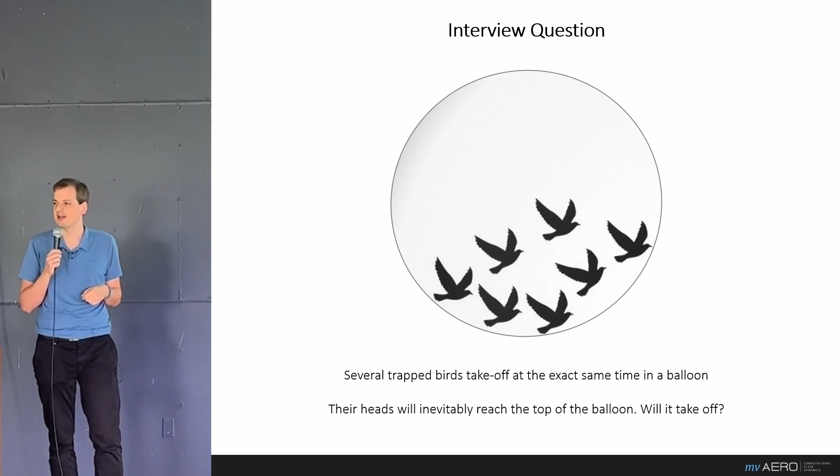Here's one question I remember, and it has to do with a couple of birds that we trap inside a big balloon. John said that he would give the signal to these birds to take off at the same time. And then he would ask me, well, these birds will inevitably take off, and at some point, their wings and their heads will reach the top of the balloon, imparting some of their momentum. So, will the balloon take off or not?

Well, I won't give you too much time to think about the answer. I wish I could. But what John was after was really to see if I had a fundamental understanding of aerodynamics. And that means that whenever the bird goes up, something else must come down. And that something else here is air. That's a fundamental action-reaction principle.

So whenever the birds are hitting the top of the balloon with their heads, an equivalent momentum is imparted by the air pushing down on the balloon. So the answer to the question is no, the balloon does not take off, it actually stays put. It may tremble a bit, it may shake a bit, but overall the balloon will stay where it's at. Another way to look at this question is to see the balloon with air and birds as a closed system. From this closed system, no downward momentum can escape. Hence, the balloon does not lift off.

Well, I guess I passed the test, and John and I really hit it off from there. I think where John and I really hit it off was where I introduced him to modern CFD methods. So you can see on the left, John was still using VS Aero at the time, which handles about 5,000 panels for a small aircraft, while I was working with about 50 million elements for a similarly sized craft.

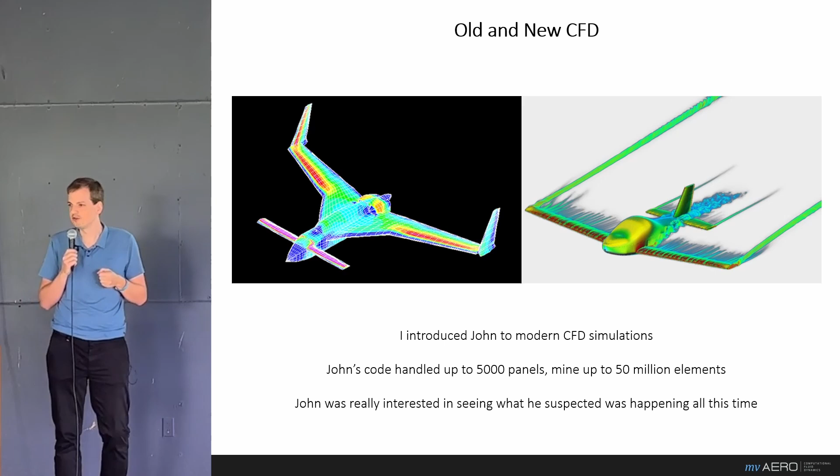Now, what John was really interested in is seeing what he thought was happening all this time. He had all this experience with flight testing and wind tunnel tests, but he never really had the tool to visualize that. And that really never changed.

Over all these years working together, John and I were always analyzing my CFD work together. Whether it was Windecker aircraft, you see on the top left, Alec Wild's Ascender on the top right, which I'll go into a bit more detail later, whether it was flap design, aileron design, airfoil design, and in the bottom right, you even see a 2D cross-section of a vertical axis wind turbine. So John and I really covered a broad spectrum of aerodynamics, which allowed me to learn a lot from John, really.

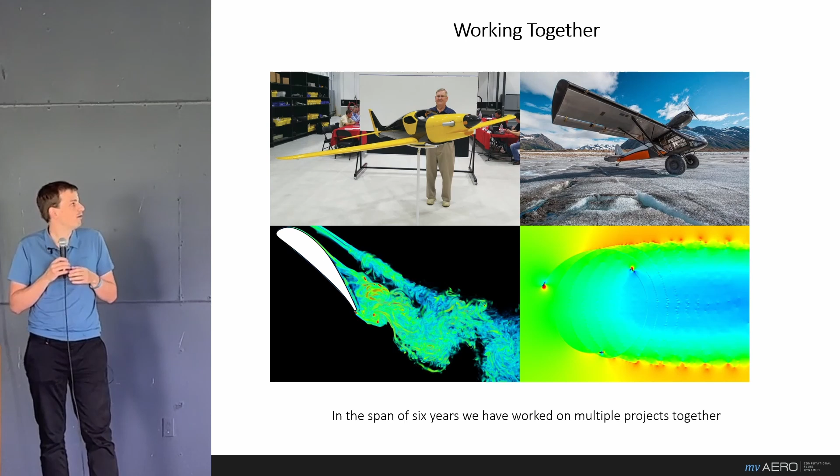And now, we cannot talk about John without going into his favorite pet theory. It's called John's porcupine theory.

When John would look at an airplane, he would notice the high number of appendages sticking out, and he would call that airplane a porcupine. To John, they were too many and also often placed at the wrong position, causing too much drag, and John would be prompted to say something like, well, at least it's a great device for too much airspeed.

That's a typical humorous response from John, and I think that is very telling of the way he approached aerodynamics. Most people would look at an antenna like that and see an insignificant addition to the airplane. In terms of weight, in terms of geometry, it is. But in terms of aerodynamics, John would see the actual drag equivalent of that.

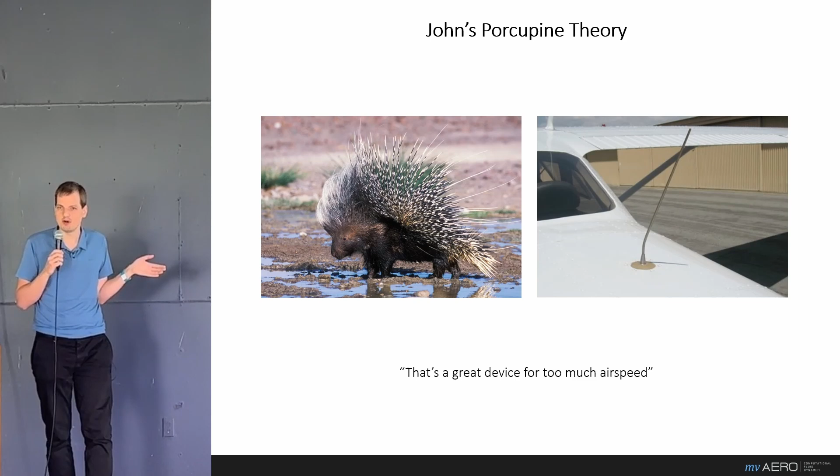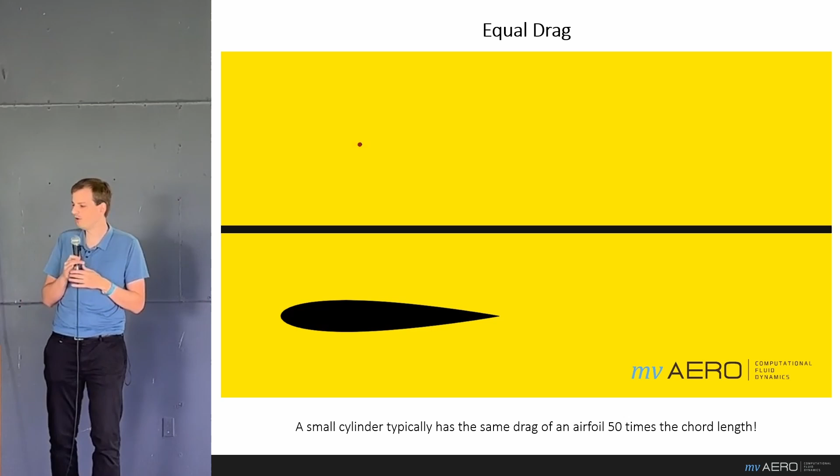That's almost like adding a small vertical tail. And if you think I'm exaggerating, here's a simulation I did of a cylinder versus a small red dot on top versus an airfoil 50 times the chord length. Both simulations are in full 3D, but we're zoomed in on a 2D cross-section.

As you can see, the flow over the cylinder is very violent. It affects only a small amount of air, but it affects it by a lot. In contrast, the airfoil affects a lot of air, but it only reduces its energy by a little. Overall, making it so that these two geometries have equal drag. So it's important to keep that in mind whenever we need to add an antenna.

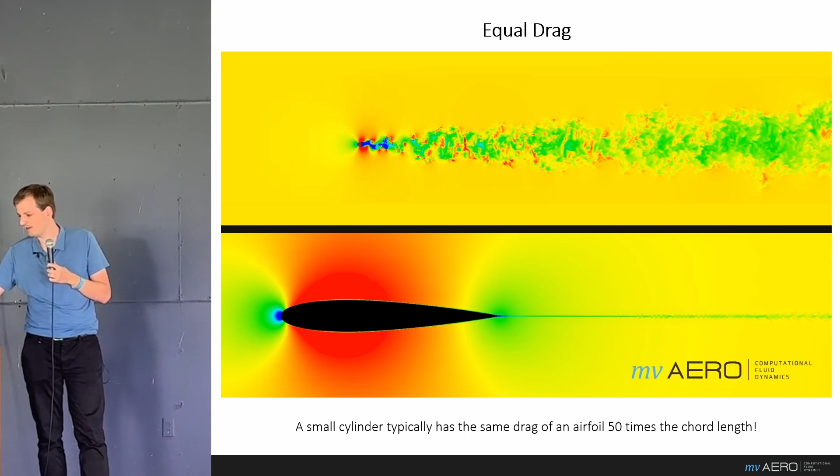Now, our next topic is the wing fuselage junction. And again, John would approach it in this humorous way. He said a wing and a fuselage are married together by force, and it's our job as aerodynamic engineers to make it into a happy couple.

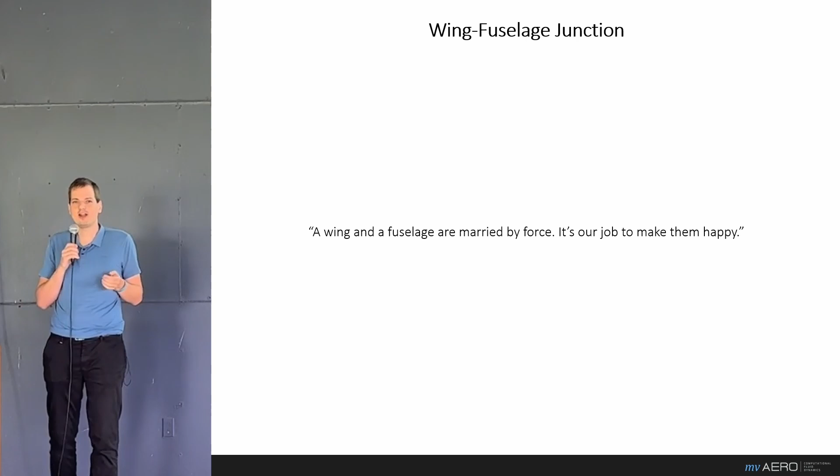Whenever you're designing an airplane, the wing and fuselage will need to come together one way or another. And this lesson recognizes that there are both good ways and bad. And that all has to do with how two surfaces interact. In general, they bring out the worst aspects in one another. One thing that happens is that the local velocities will start to increase, increasing friction per square foot of wetted area.

But the second thing that happens is now a certain mass flow of air is assailed from two directions. It doesn't lose energy from just one surface, but now two. So there's really potential for trouble here.

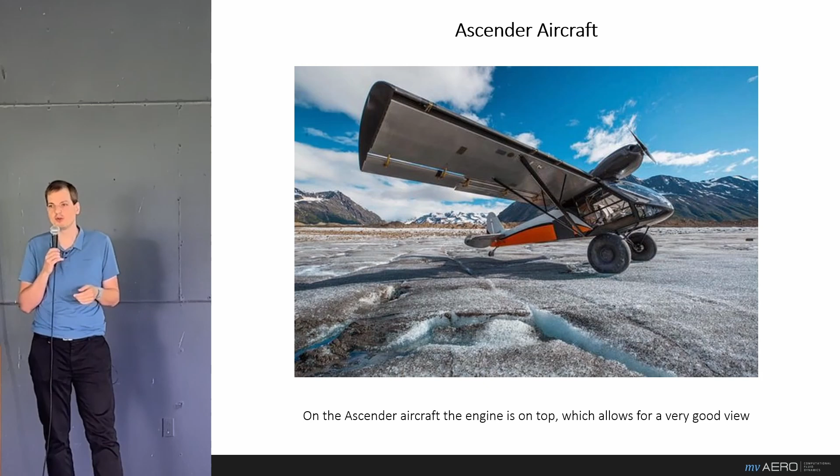And for the Ascender aircraft, the engine is on top, and it allows you for beautiful views, and I recommend all of you to look up some videos of that online, but it does introduce a very similar problem. We now have an interaction, or junction rather, between the engine cowling and the fuselage. This is, on the left, the baseline model that John and I started with.

You can notice a very narrow junction. On the right, you see a cross-section of the OML and the airplane in blue of how that junction looks. You can see it's very narrow, and the small bit of air is losing energy from two sides. So we have quite a bit of friction for the amount of fresh air.

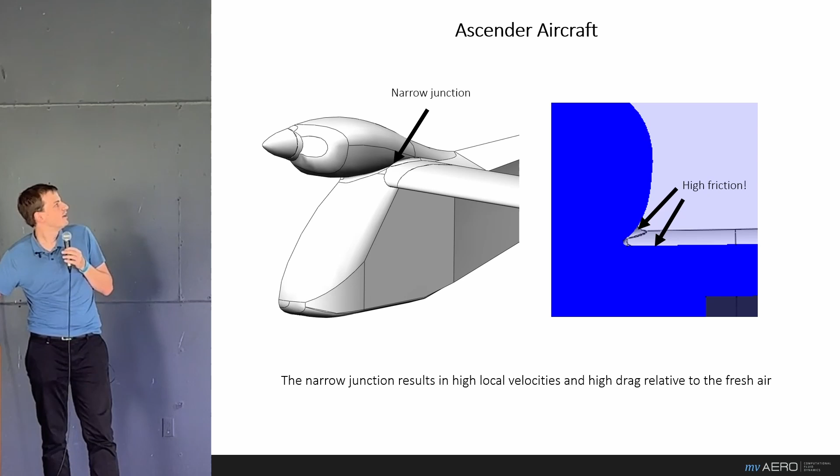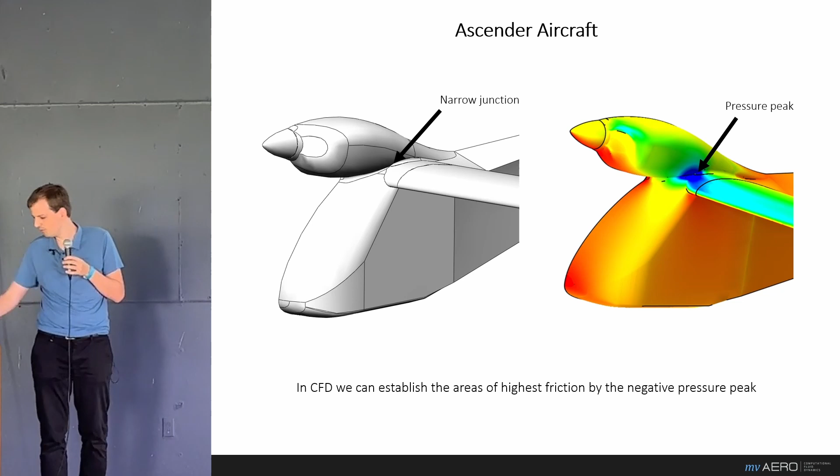Now, if we simulate this in CFD, we look for the low pressure areas. These are areas of high velocity and high stress on the boundary layer, and we notice that this pressure peak is exactly on that junction. So we have some problem here, but now that we've identified the problem, the solution also comes quite easily.

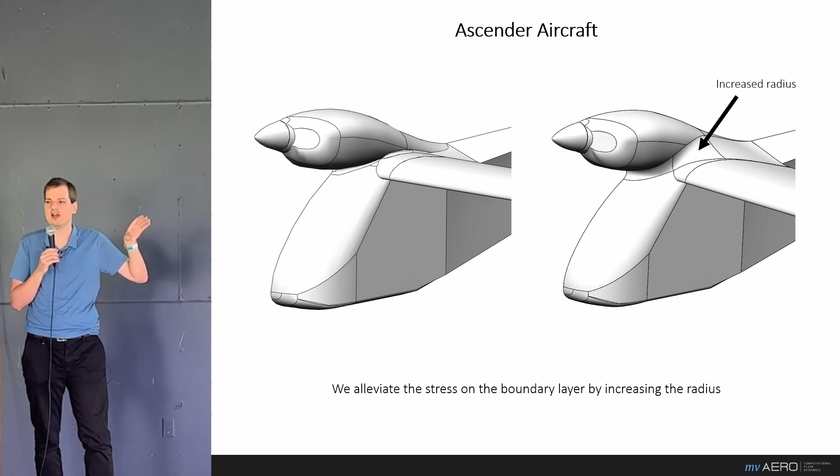Using a fillet here, we reduce the contact area with the air, so we immediately reduce the amount of friction. But we can do more. We can also very carefully design that fillet such that its lowest pressure area is changed in its location a little bit.

You can see that here. So on the left is the baseline, on the right is the modified version. And you can notice two things: the increased radius on the right, but also a lower negative pressure peak.

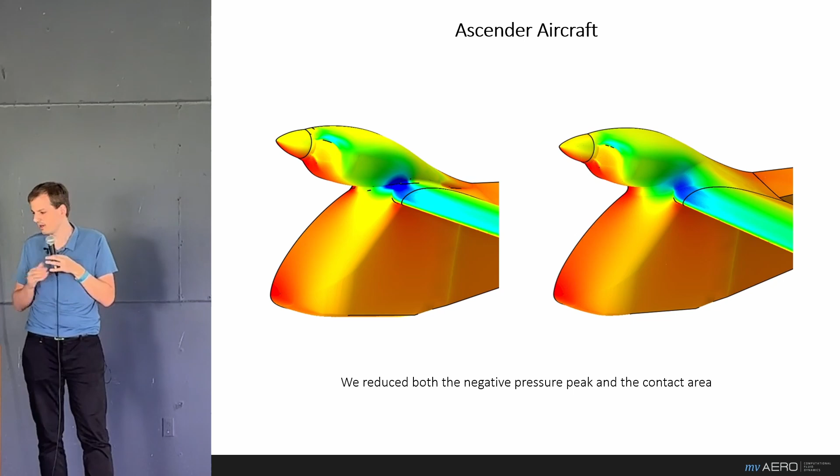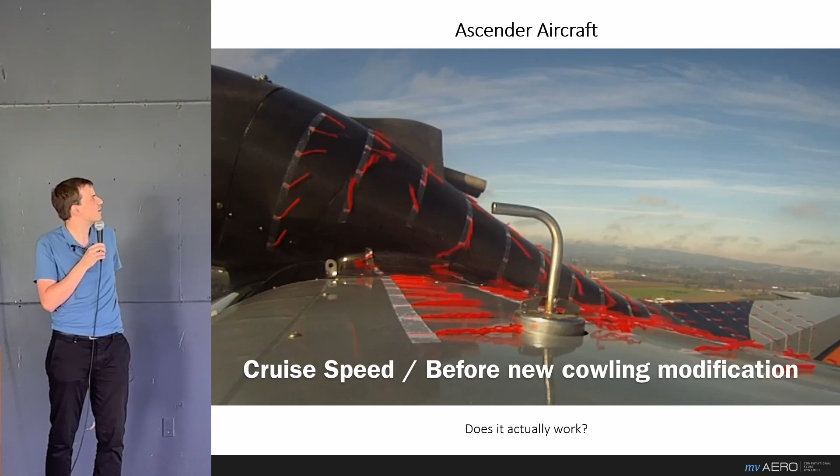Now, that's great in terms of theory, but will it actually work? Well, this is the Ascender aircraft. We're looking at cruise inboard, and you can see the junction, and the cotton veins are really all over the place. This is before the cowling modification. Some of the veins are even moving upstream, indicating large zones of separation, large turbulence in general.

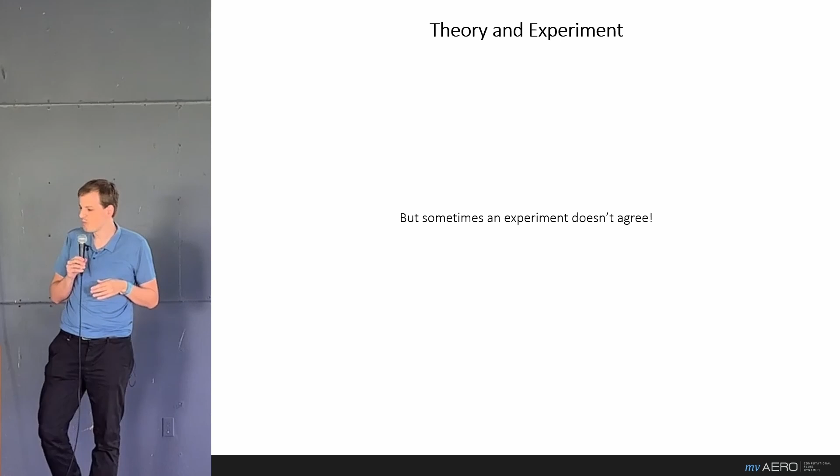Overall, I think this cowling modification is a great success. We've identified a problem. We basically had a very straightforward solution. We verified it in CFD, and finally it agreed with experiment. But there are also projects where the experiment doesn't agree, and it's pretty interesting to go into what John would do then.

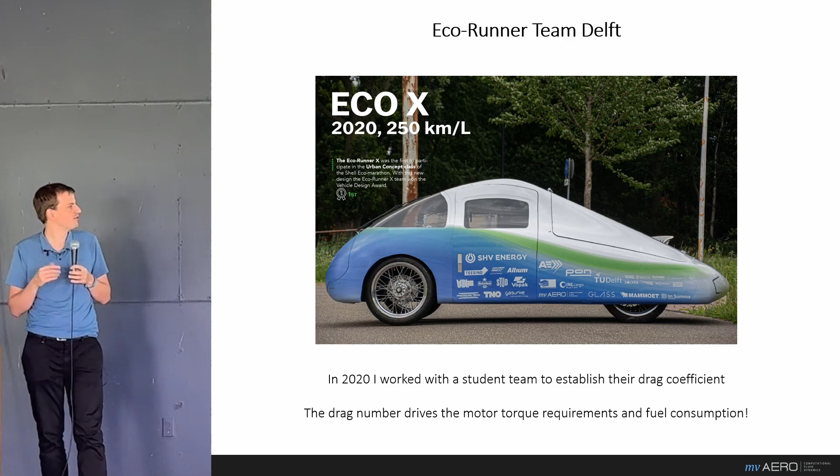In 2020, I was working with a couple of students at Delft University who had a goal for one year to design and build a small car that is as fuel efficient as possible. As you can see, it's quite a small car, and for this type of car, the drag estimation is going to be quite important. The estimation drives the motor selection, and it has a huge impact on fuel consumption.

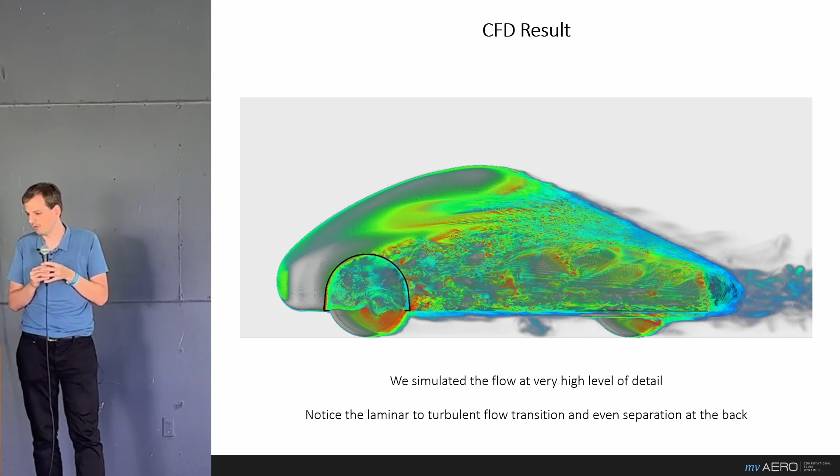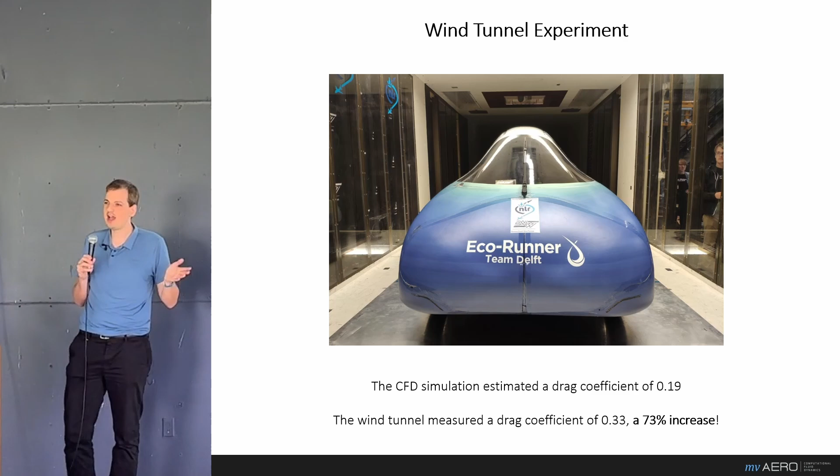This prediction was a drag coefficient of 0.19. This is months in advance of the car being built, and after the car had been built, we decided to test it inside the wind tunnel. There we found something quite strange. We did not find my prediction of a drag coefficient of 0.19 at all. Rather, we found a 73% increase. We found a drag coefficient of 0.33. So you can imagine these students weren't all that happy with my work anymore.

Well, what to do? In particular, we can ask, what would John do? I was lucky enough at the time to be able to ask him, and I discussed this very issue with him. John replied something like, don't believe the results of an experiment unless it can be backed up by theory.

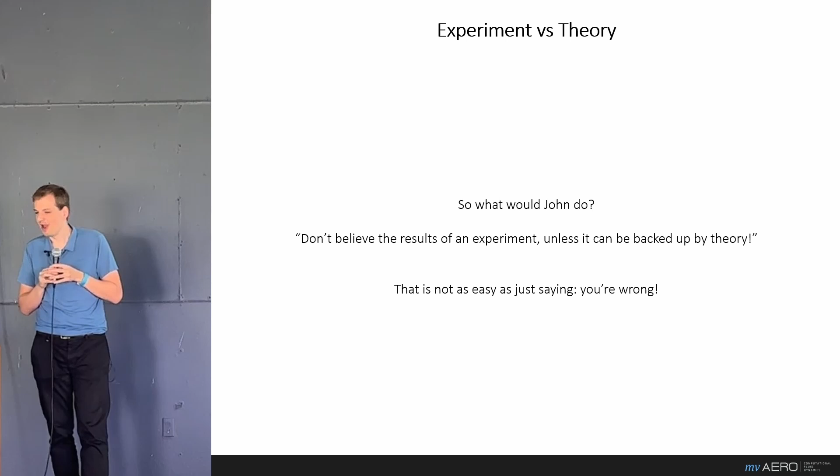Now, that's kind of reversing common practice, but it's not as easy as simply saying no. I mean, I could just tell the guys at the wind tunnel, you're wrong, and I'm right. Well, that's not like John. What John meant is, if I stand by my results, if my prediction method is fundamental to me, then it becomes my job to find out what actually happened in the wind tunnel. The burden of evidence is really on me.

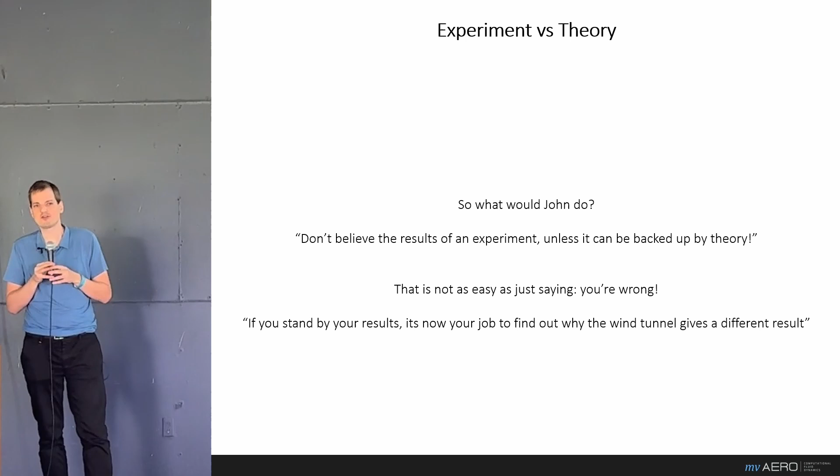So I did. I started looking back at the wind tunnel. We can notice two things from this image alone. One thing is the car is relatively large in size compared to the wind tunnel cross-section. The wind tunnel is pretty big, but still relative to the car, it's not that large. The second thing is, you may notice that the car is bolted, or fastened rather, to an aluminum base plate. The drag is actually not measured on the car directly, but rather on the combination of the plate and the car.

So I ran the exact same high definition simulation again, and that gives us a great comparison. Now we can compare what the velocity field looks like in open air versus the velocity field in the wind tunnel. Note, these are exactly set up the same in CFD, except the wind tunnel simulation has the constrictions of the wind tunnel size. You may notice immediately that the wind tunnel has much higher velocity, and this is due to blockage. This higher velocity increases the drag coefficient on the car considerably.

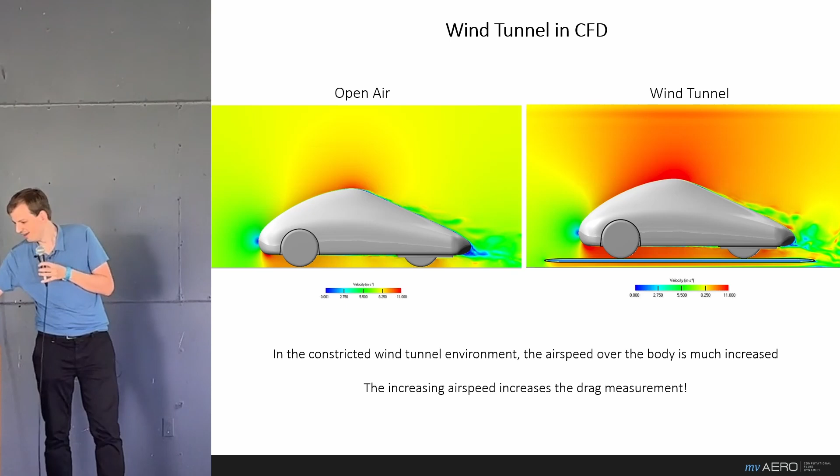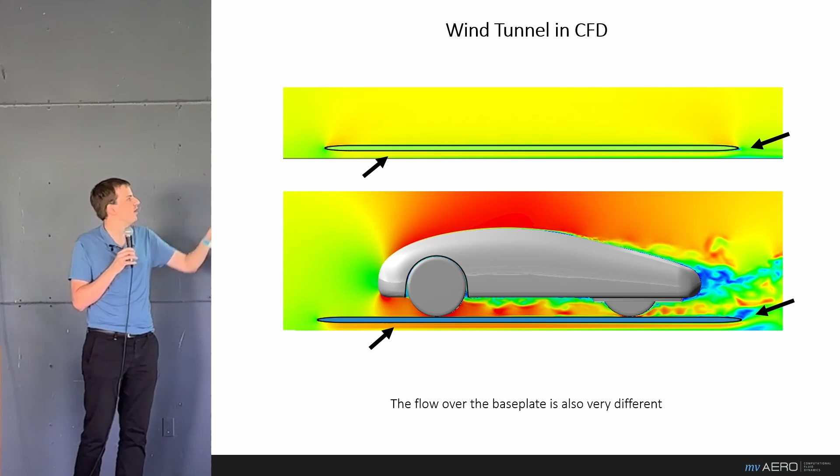Now the second thing is to investigate the base plate. Up top you see the base plate without the car in CFD, and below you see the base plate with the car present. If we focus our attention on the flow around the plate, we notice it's much more disturbed on the bottom whenever the car is present. Not only are the velocities much higher, but also if you look at the trailing edge, we notice some separation on the plate.

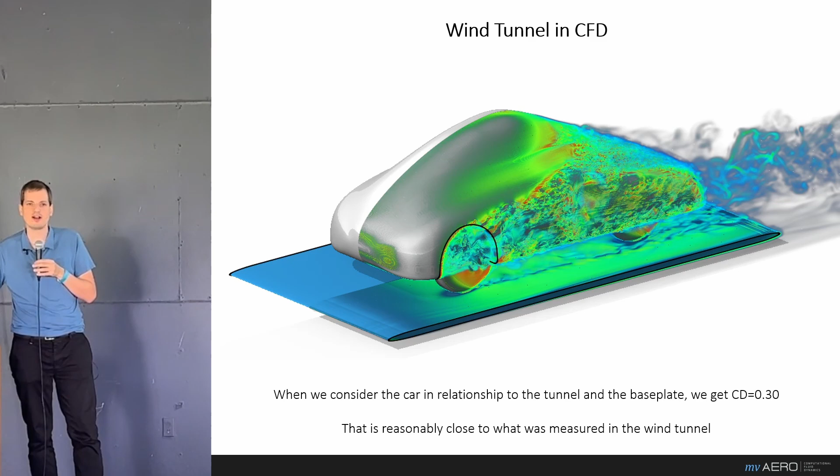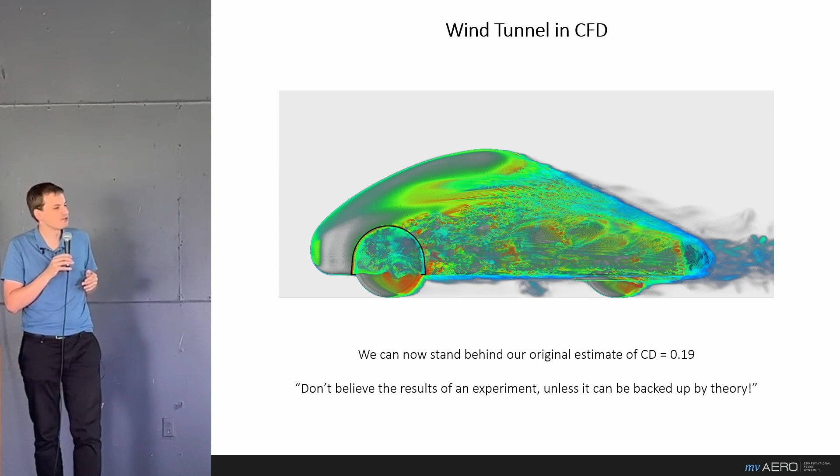Now, if we put these two issues together, we can now get out of CFD the drag coefficient as if the car would be measured in the wind tunnel. This time we get a drag coefficient of 0.3. Well, that's close enough to the wind tunnel results to me. I think this is a really great example of how the wind tunnel guys are not necessarily wrong, but it is a question whether their setup was representative of the car in open air. After all, that's what the students were after. So we can say now with quite a bit of confidence that our original estimate was probably correct. And again, don't believe the results of an experiment unless it can be backed up by theory.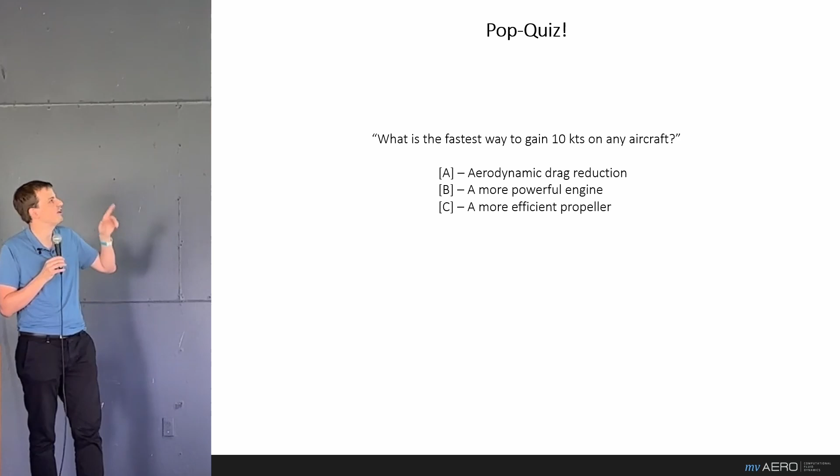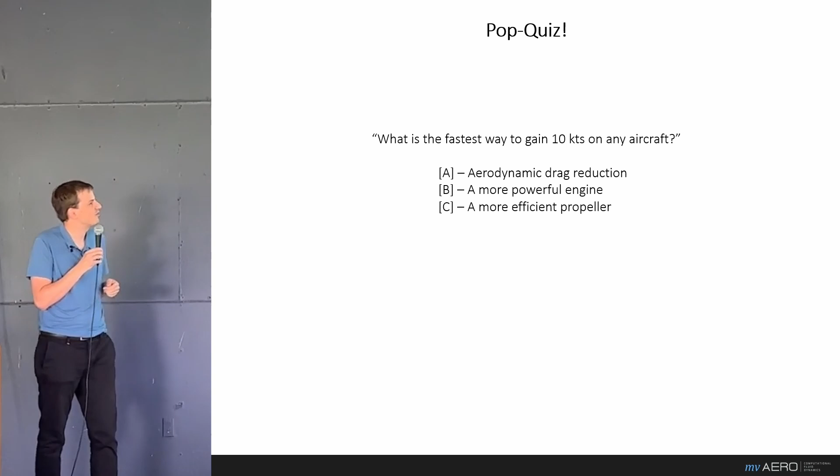Now we're about halfway through. I think it's time for a short pause in which I'll give you the opportunity to consider the answers to this question - and notice the quotation marks, it's a question by John. What's the fastest way to gain 10 knots on any aircraft? Option A, aerodynamic drag reduction. Option B, a more powerful engine. Or option C, a more efficient propeller. I'll give you all a couple seconds.

Well, is there anyone who would dare to take a guess? I have a question - how fast is the airplane going? What's the base case speed? You'll find out it's irrelevant.

Len, what do you think? I think it's D - put the airplane in a dive. Len is really on a track here. Sir? B, add more power. You do that faster than all the computations or other stuff. Well, we're getting real good answers here. I think every answer will work. Len was really close, because actually it is secret answer number D.

It's not only a question by John, it's also an answer by John. And the fastest way to gain 10 knots on any aircraft is by simply moving the static port 2 inches.

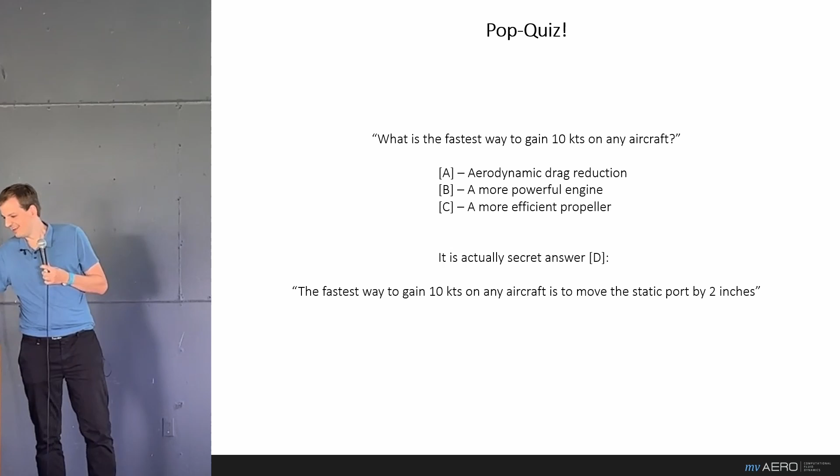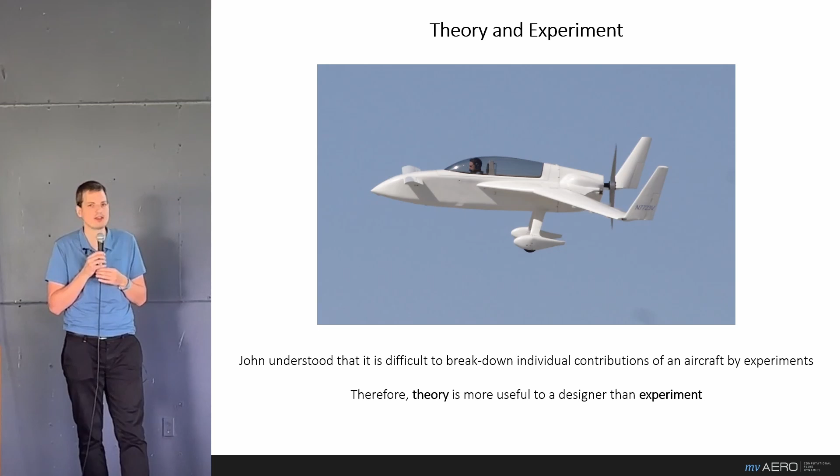Now, it's not only a joke, I think it's also very insightful. It tells a lot about how John thought about experiments. He understood that it's very difficult to break down any individual contribution to an aircraft by experiment. And that's why theory was so fundamental to John - that's why he liked it so much. He could really get into a drag breakdown with theory, and not by experiment.

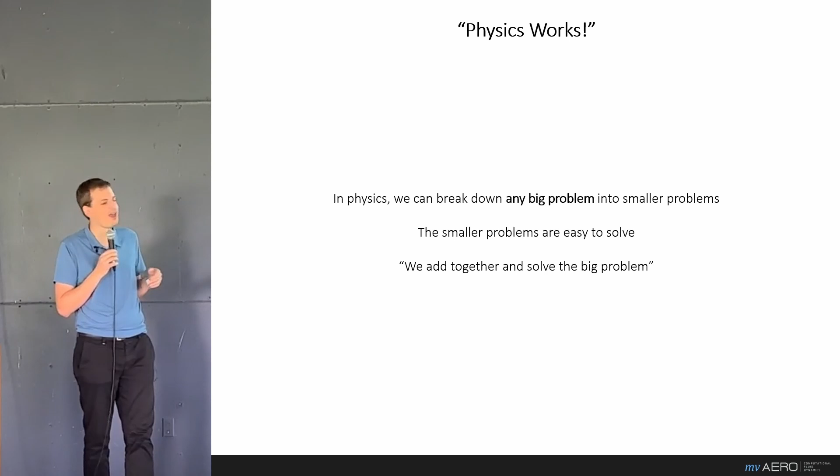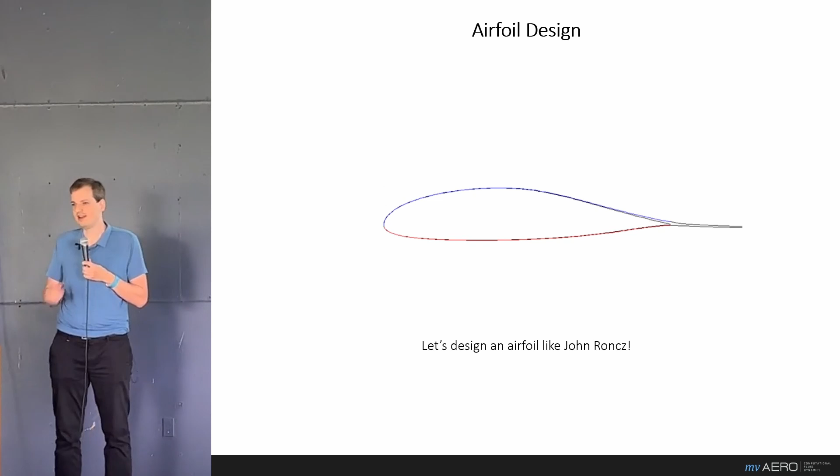Now, what impressed me most about John over these years is his ability to look at a big problem and break it down into a number of smaller problems. He would say 'physics works!' with an exclamation mark. He'd say whenever we look at the small problems, they're pretty easy to solve, and when we add them together, we've just solved the big problem. I can't think of a better example to showcase that, especially in tribute to John, than designing an airfoil together. We're going to use a step-by-step approach, and I'll show you it's really not that difficult.

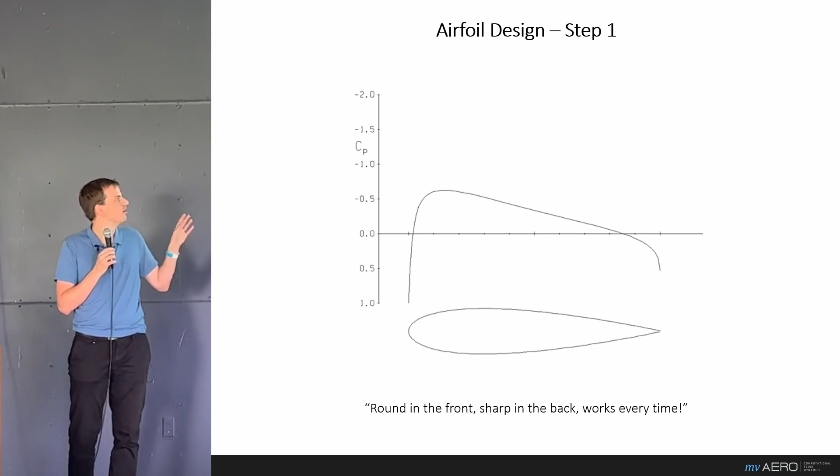Step 1: round in the front, sharp in the back - works every time. And it truly works every time. Once we have this, we're really in clear water. We're safe. We can still improve, definitely, but nothing crazy is going to happen.

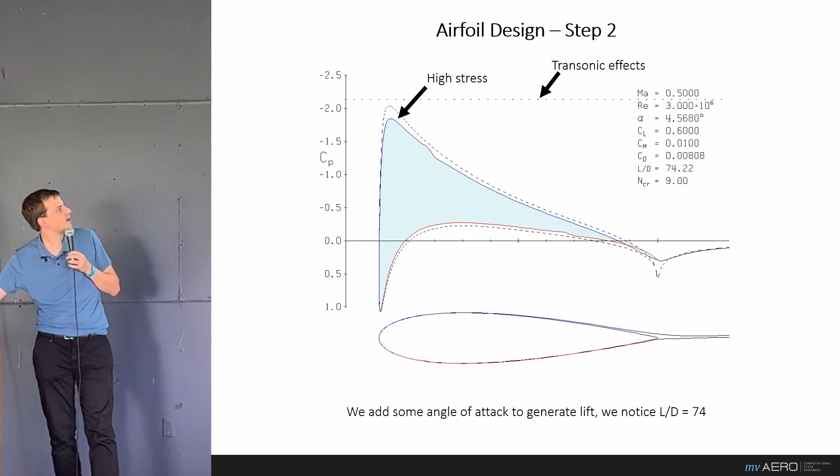So what can we do? Well, we simply add some camber, nothing special. We're now already at an L/D of 115. And as you can see, some things have changed - we have now lowered the negative pressure peak, but there are still some things we can improve.

Most notably, these three. First, we notice that on the bottom leading edge, it's actually eating away from our lift potential a little bit, so we want to bring that down. Then on the top, even though it's better than before, ideally we'd have the negative pressure coefficient flat as a pancake - we want to spread our stress on the boundary layer as much as we can. And third, around 70-80% chord, we don't have equal pressure, so the image might look good here, but whenever we're adding ailerons and we have a gap there, that might cause us some trouble.

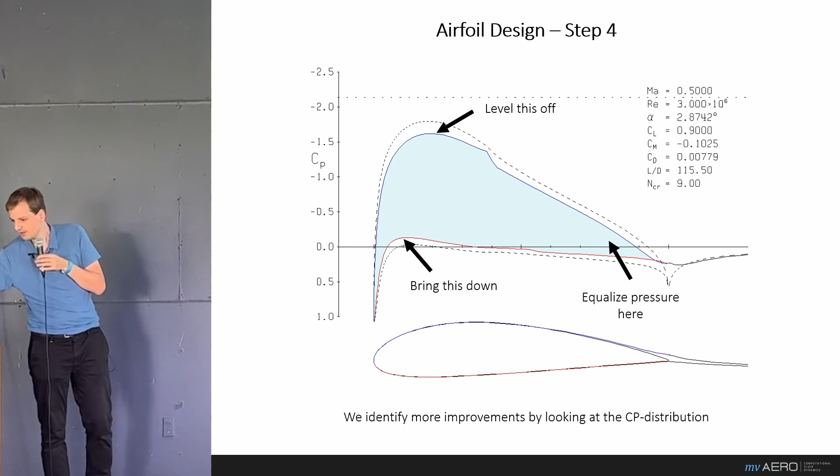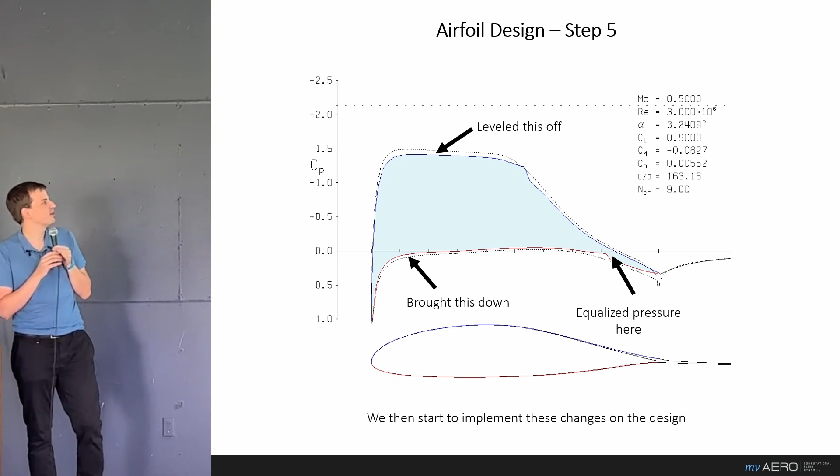So this is exactly what we did - these three steps. We leveled off the negative pressure peak, we brought down the pressure distribution at the bottom leading edge, and we equalized pressure at the trailing edge. Believe it or not, this is a pretty good airfoil - we now have an L/D of 163.

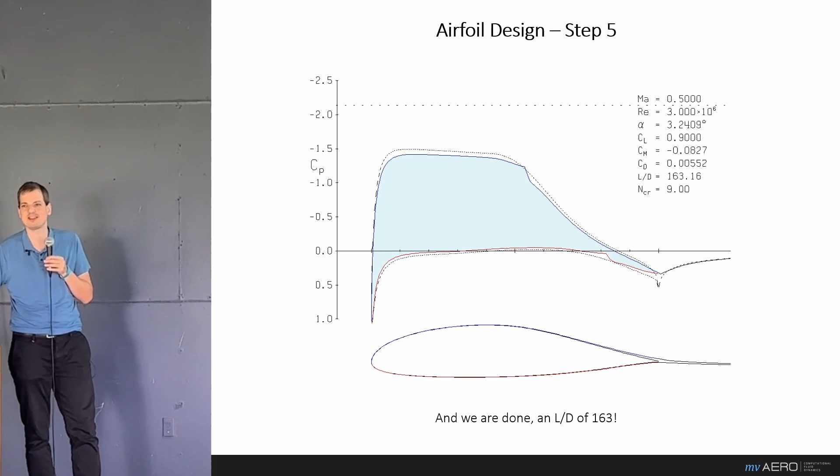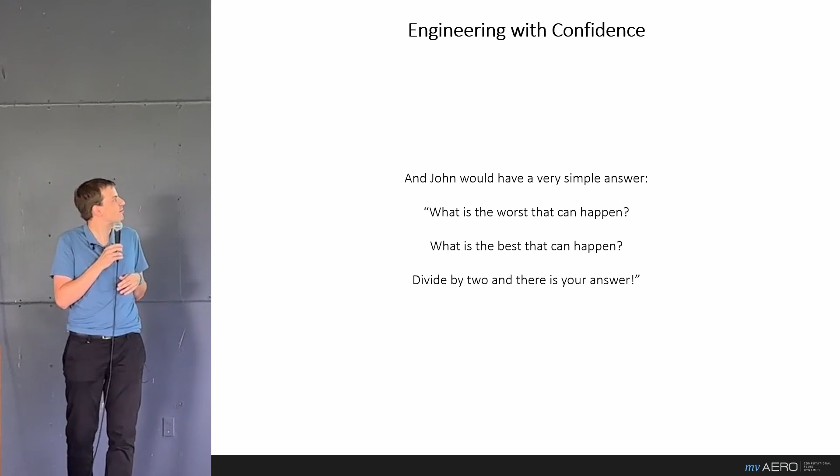That brings me to another quote of John's, probably his most used and also most misunderstood: 'It's not hard to be the best, because no one else even tries.' How do we reconcile that with John's humble personality? Doesn't seem like John at all.

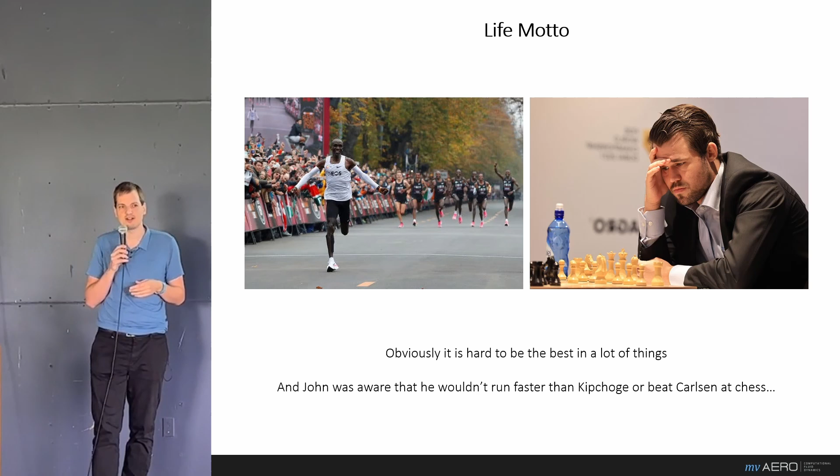Obviously it's very hard to be the best at a lot of things, and John knew that. He knew he couldn't outrun Kipchoge in a marathon or beat Carlsen at chess. But both running and playing chess always point us in the right direction. When running, training for a marathon, there's your heart rate, calories burned, pace improvement. When playing chess, there are literally arrows pointing us to how we should have moved and how we should move next time.

That's simply not true for aerodynamic design. It's not very clear how to become really good at it, let alone a master at it. We might ask ourselves, where are our arrows?

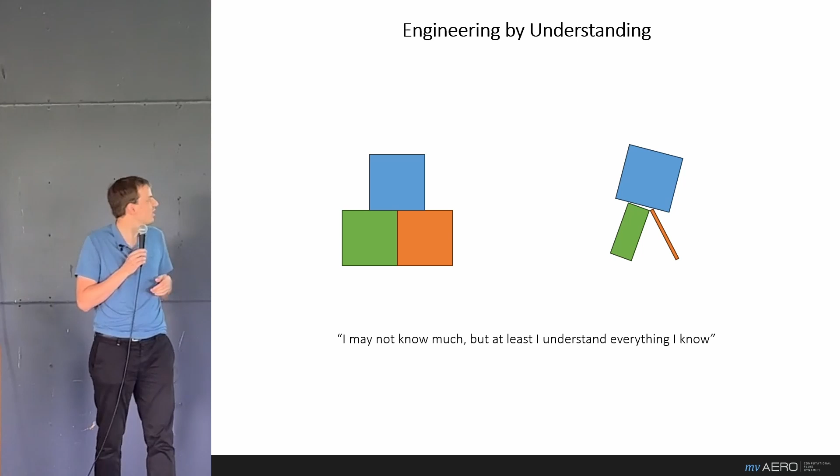John partly answers this question with another life lesson. He'd say, well, I may not know much, but at least I understand everything I know. I think this quote is really fundamental to John's thinking and his success over the years. What it means is that we can only build on top of what we truly understand. We cannot build new knowledge simply on what we already know — we really need to understand it too.

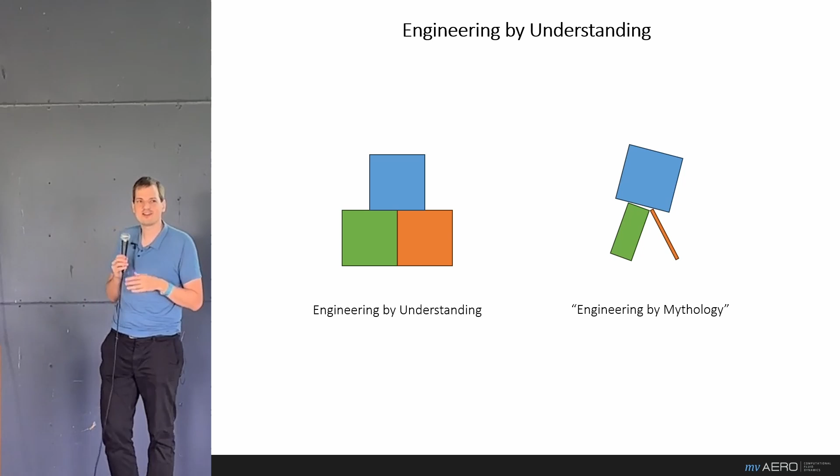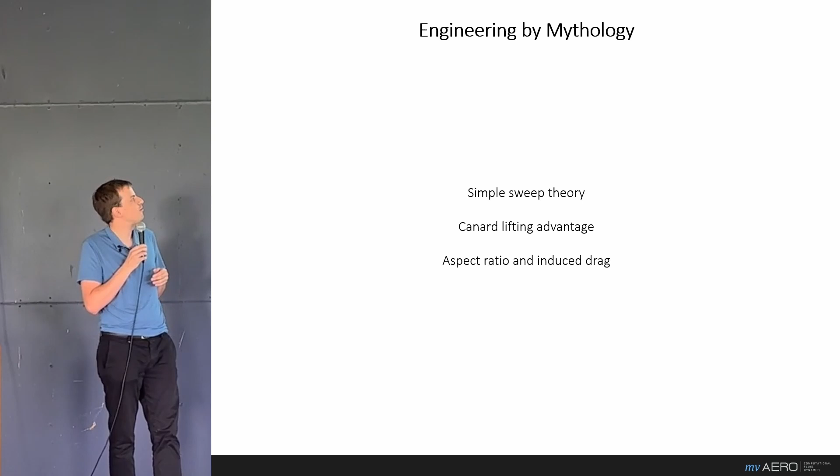Whenever we make new theories based on just knowledge and not understanding, we get something John called engineering by mythology, in contrast to solid engineering, engineering by understanding. There are quite a few mythologies around in aeronautical engineering. These are three of my favorites, but we only have time to go into one: simple sweep theory.

To explain the myth, I first need to explain the myth itself. The idea behind simple sweep theory is that whenever you sweep back a wing, the effective flow direction is perpendicular to the leading edge — not going straight down, but perpendicular to it. That delays transonic effects because sweeping back a wing makes the normal component always smaller than the flight stream component. For example, with 30 degrees of sweep, that decreases your normal component by 13%. So according to the theory, you might say our effective Mach number is 13% lower.

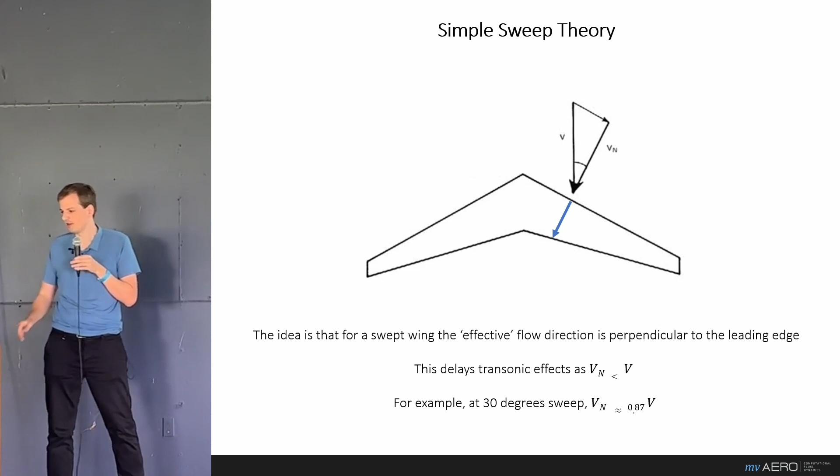But I don't consider this a real explanation at all. First, it raises an important question: why exactly are we not considering the streamline or chord in line with the flight axis? After all, we're moving forward, encountering air that has momentum along this direction — that's what we're changing with our wing. I don't get a good answer from simple sweep theory as to why we shouldn't look at this picture instead.

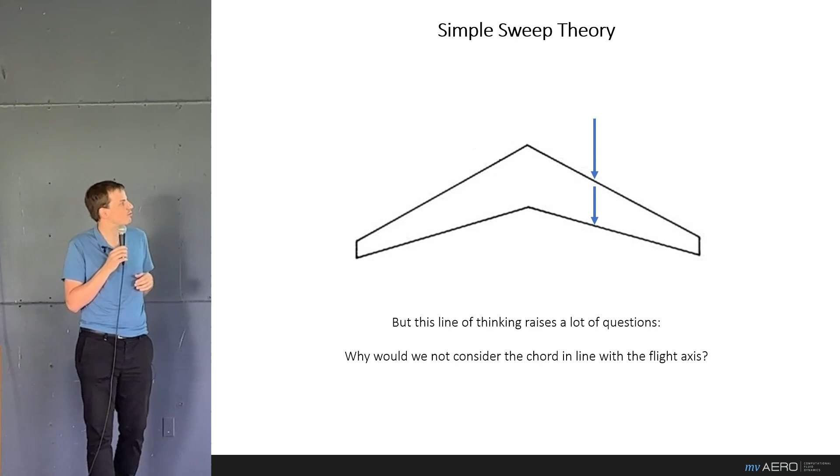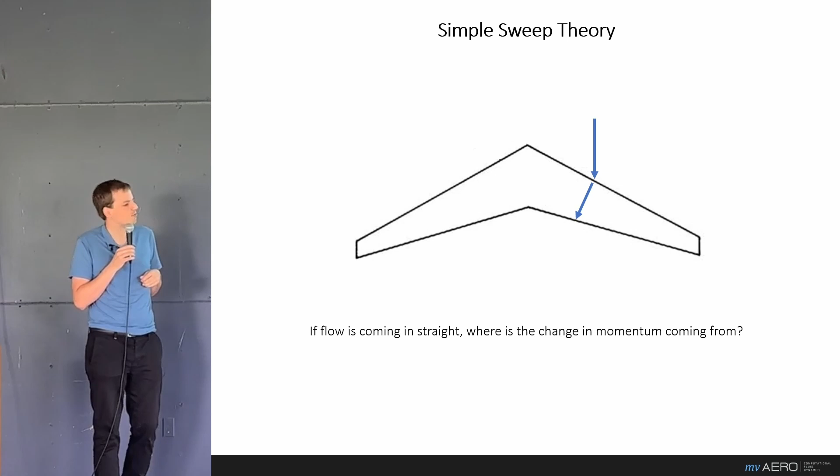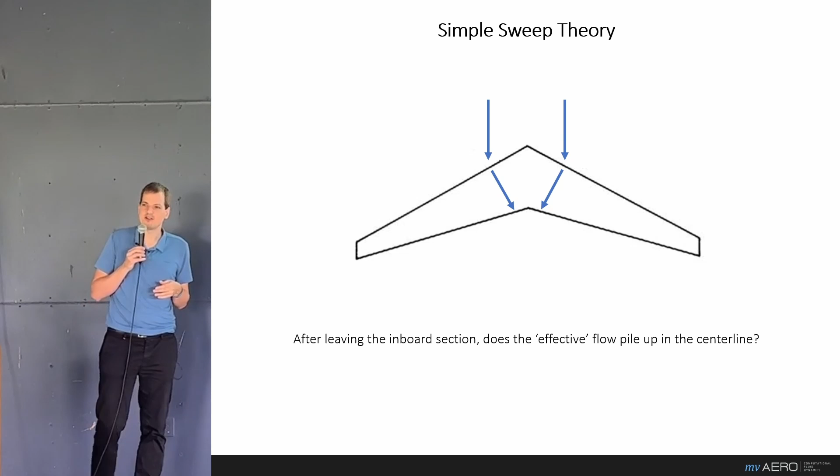It gets a little worse, because if we consider the perpendicular flow, we might ask: where's that change in momentum coming from? Is it just illusory or is it real? More trouble arises when we look at the inboard section — would we really dare say the effective flow piles up at the center line, or worse, crosses one another along the symmetry plane? What about 90-degree sweep — will we say the flow turns 90 degrees? Something's clearly wrong with this picture.

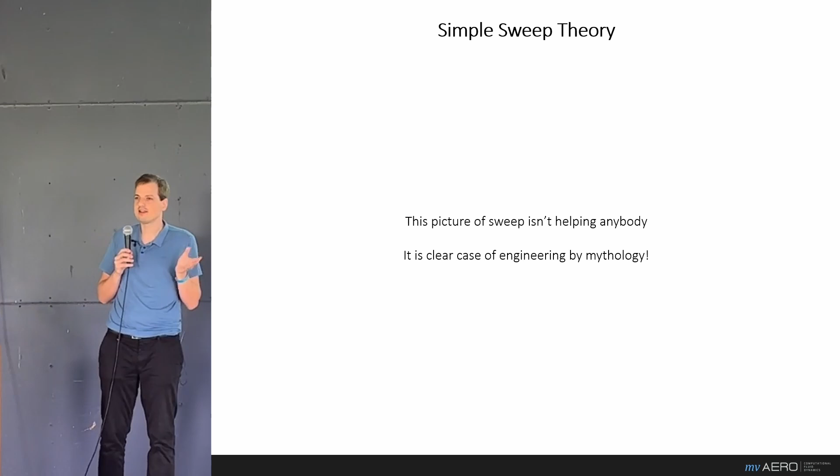I think this picture of simple sweep theory isn't helping anybody — it's a clear case of engineering by mythology. The real reason sweep works is a bit complicated, but once you understand it, you won't be able to forget it.

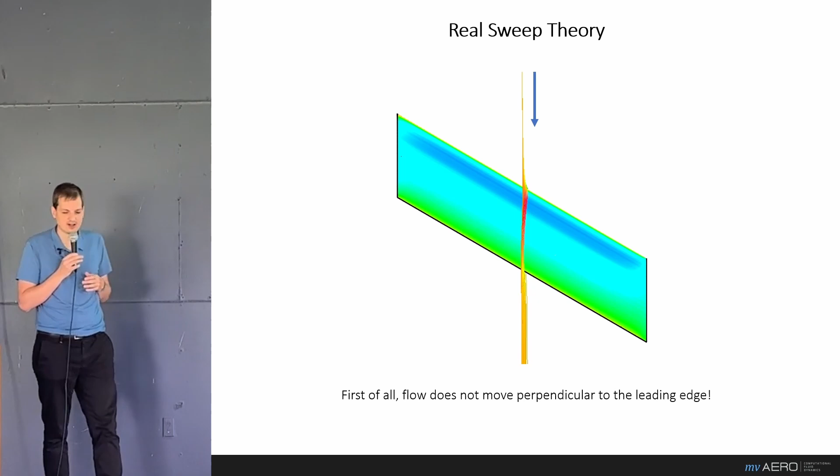I first want to show you, without a doubt, that flow does not move perpendicular over the leading edge at all. This is a CFD simulation of a 30-degree swept back wing, and we're following a couple of streamlines from the top — as you can see, they move almost straight back, certainly not perpendicular. I would like an explanation that deals with the real flow, rather than perpendicular, effective, or perhaps mythological flow.

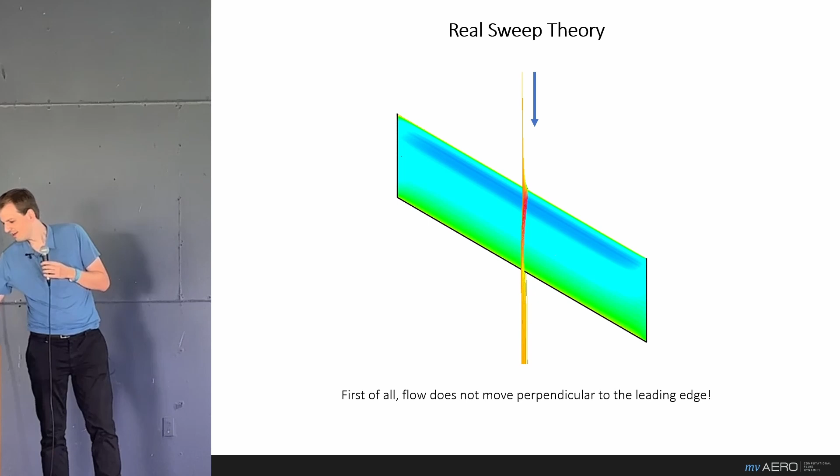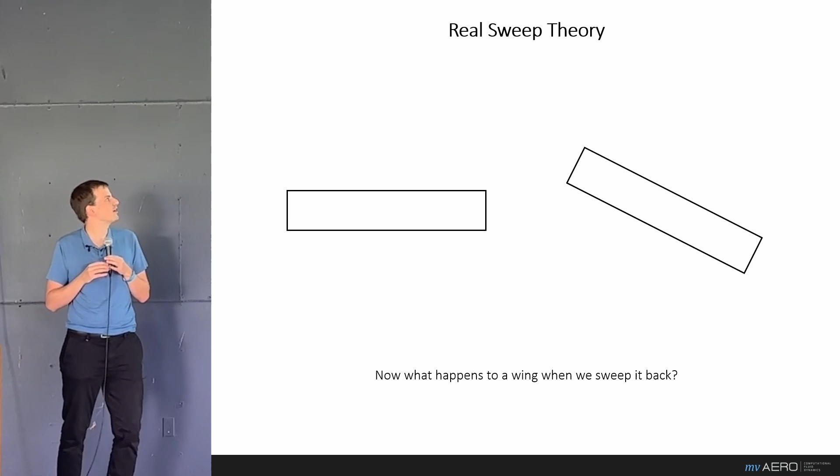It's pretty interesting to look at what sweeping a wing actually does to a wing in terms of geometry. We have a rectangular wing on the left and a swept back wing on the right. It's the same wing with the same wing area, but as we sweep back, we reduce the span, and therefore, to keep the same area, we have to increase the chord.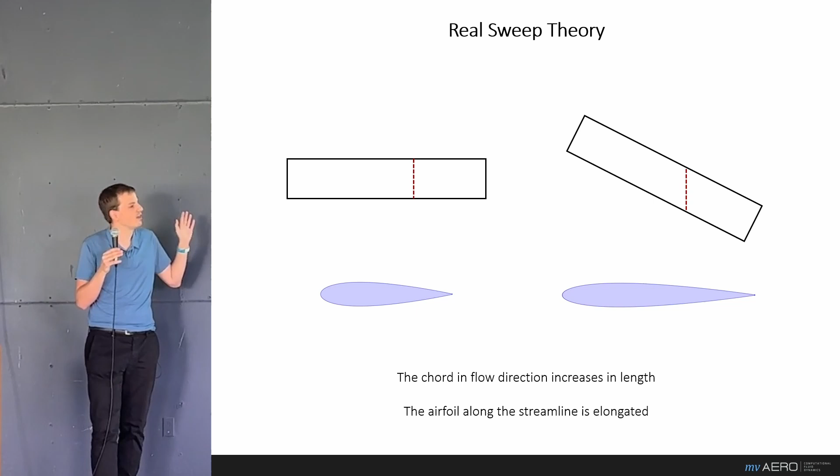You can also see that visually from the red dotted line comparison here. The chord along the flight axis is elongated in a swept back wing. This effectively, if we look at an airfoil cross-section, elongates the wing and reduces its relative thickness.

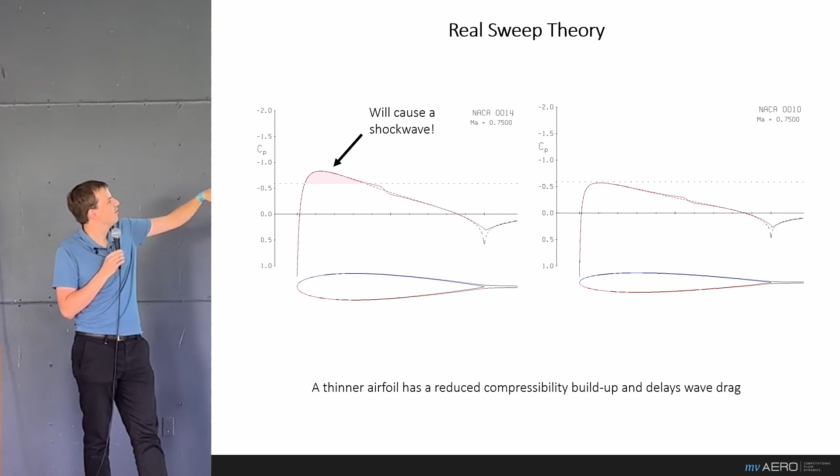Relative thickness is really important for compressibility buildup and for supersonic and transonic effects. On the left, you see a 14% thick section. It's equal, except for thickness, to the one on the right, a 10% section. This is at 0 degrees angle of attack, Mach number 0.75.

On the left, flow goes supersonic, and this will cause a shock wave, while on the right, it all stays below the speed of sound, not causing a shock wave. So a thinner airfoil will have a delayed drag onset.

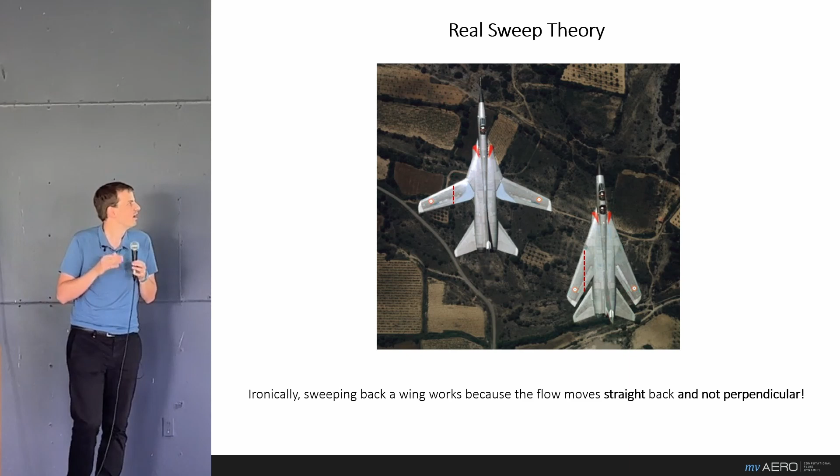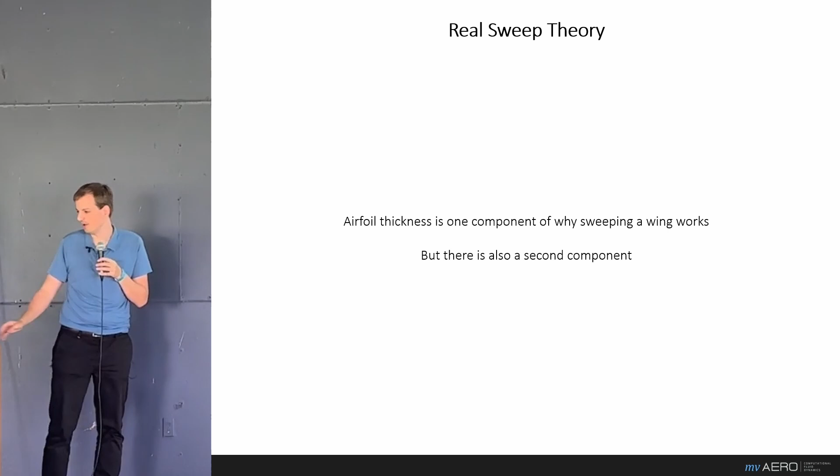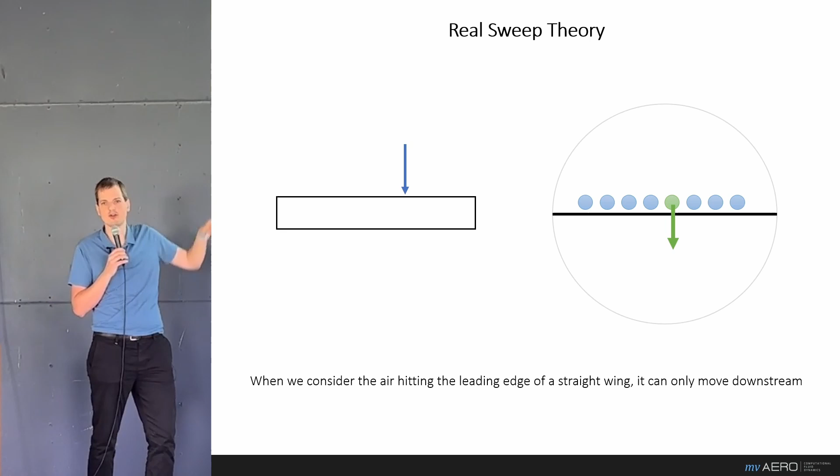We can identify blobs of air, and in particular we're going to look at the green one here. This is high pressure buildup at the leading edge. Where can it go? It can only go downstream. It cannot go left, for another high pressure blob of air is there, and for the same reason cannot go right. It certainly cannot move upstream because air is constantly coming on. So it can only move downstream.

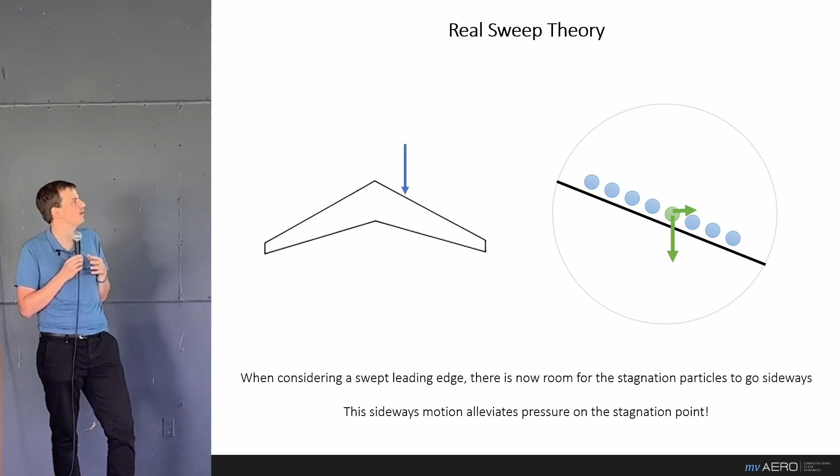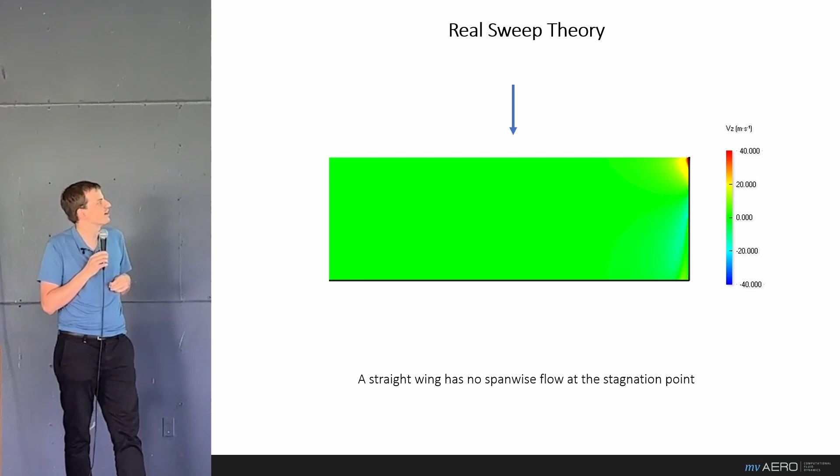When we look at that in CFD, this is the rectangular wing, unswept wing. In green, you see span-wise velocity. It's almost completely green - no span-wise velocity here, maybe at the tip a little bit, that's due to tip vorticity.

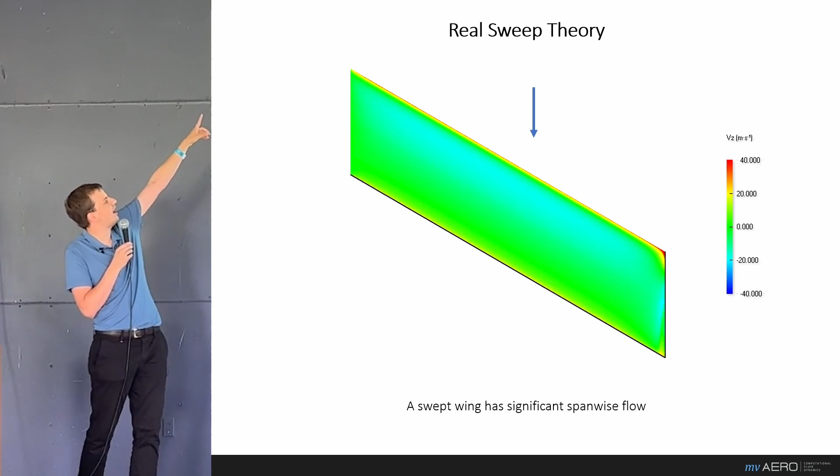But in a similar configuration of a swept back wing, 30-degree sweep, we notice at the leading edge there's a red line indicating flow is moving towards the tip - significant span-wise flow. What that does is take some of the compressibility buildup at the leading edge and turn it into span-wise flow rather than flow over the wing.

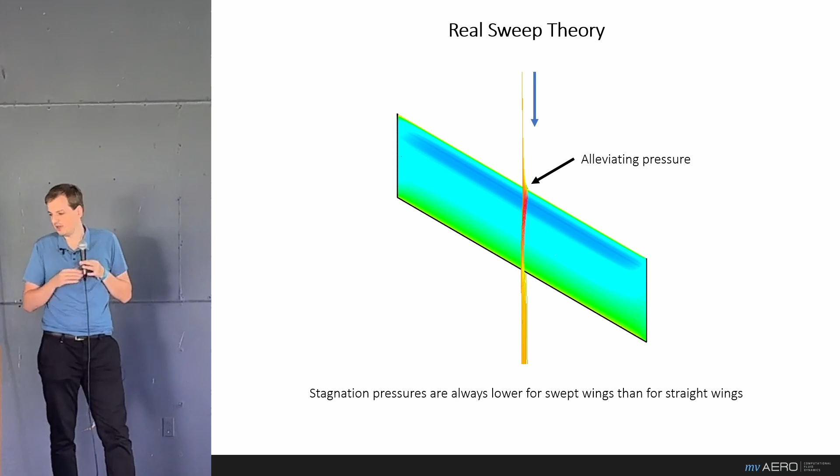So if we go back to the image we looked at earlier, if you zoom in on that, you can see the slight tendency of the streamlines to move outboard. That is basically alleviating pressure at the leading edge. That means a swept wing will always have lower pressures over the airfoil than a non-swept wing.

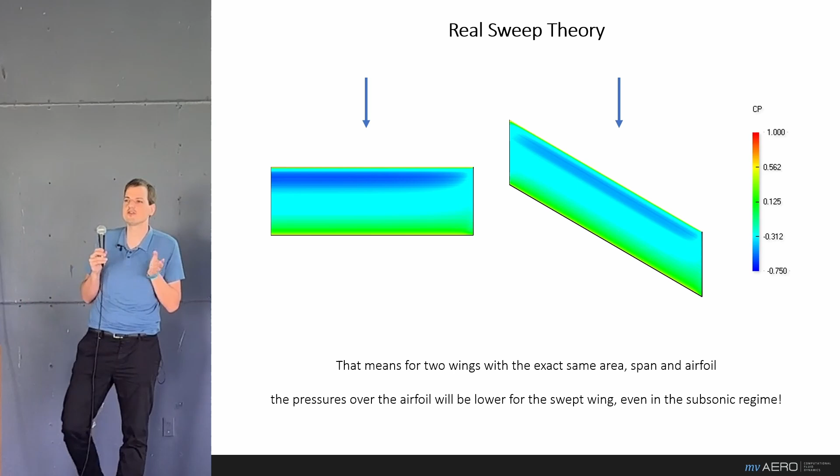And that's really fundamental. It has nothing really to do with the transonic regime. It's even true in the subsonic regime. It's true from a geometric level. So now you know the real reason why sweep delays wave drag.

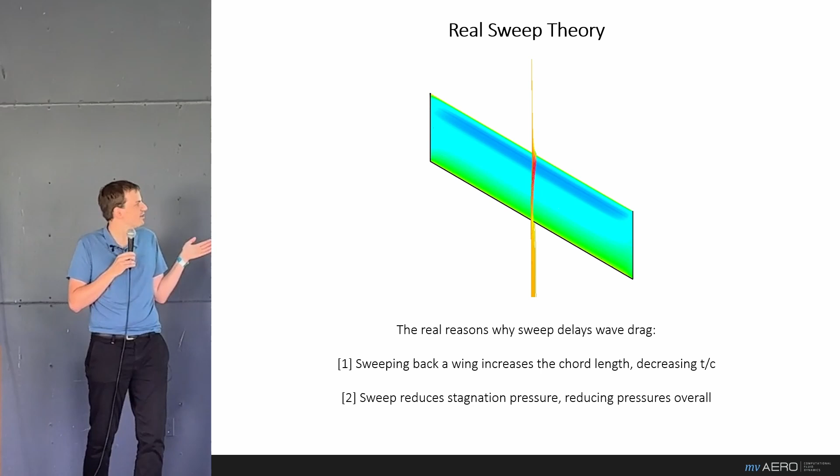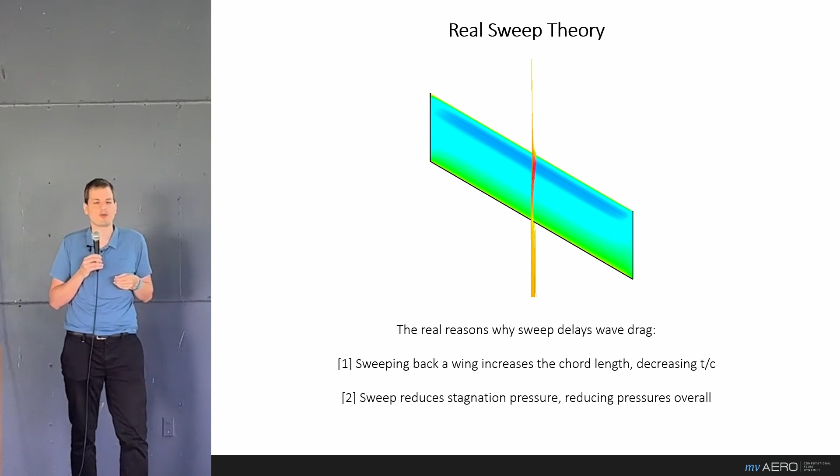First, sweeping back an existing wing will increase the chord length and thereby decrease its relative thickness, delaying wave drag. But the second, more fundamental reason is that sweep simply reduces stagnation pressure and thereby reduces pressures over the airfoil overall.

Well, that was quite an elaborate explanation, but I do hope that you take this as a good example of engineering by mythology versus engineering by understanding. They're really two different things. One you might be able to use one time, but the other is a fundamental basis on which you can build new knowledge.

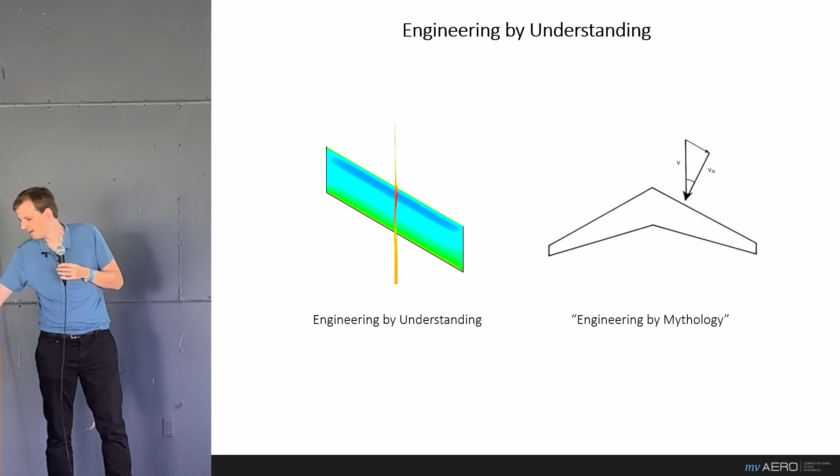Well, we've come to the end of my presentation, and I'd like to finish with one of my favorite quotes by John. I consider it a life lesson, really: you do the best you can, and you disconnect from the outcome.

Now, whenever you're an airplane designer, you can feel the weight of the world on you sometimes. Dozens of people may be affected by whatever you do, sometimes hundreds. But that kind of stress doesn't help anybody. What you have to do is simply do the absolute best you can within the time frame you're given. And that's enough, and that's comforting - that's realizing you're only a single person. And last but not least, that is exactly how to think like John Roncz.